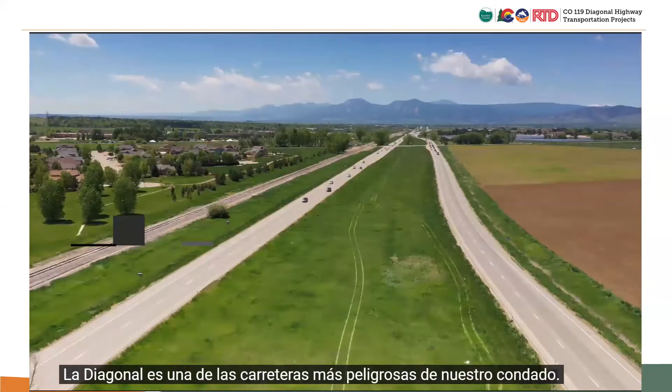State Highway 119, or the Diagonal Highway, is a vital connection between Longmont and Boulder. It is the second most traveled corridor in Boulder County, and it's only going to get busier. The communities and areas served by the highway are some of the fastest growing areas in the Front Range. The Diagonal is one of the most dangerous roadways in our county. There are far too many serious and fatal crashes.

Action is needed to address the current and future congestion and safety problems. So Boulder County has teamed up with the community and local and regional partners to create the multimodal corridor vision for State Highway 119. This vision includes transit improvements, including bus rapid transit, commuter bikeway, and roadway improvements. It will take time to complete the entire vision, but we are making progress.

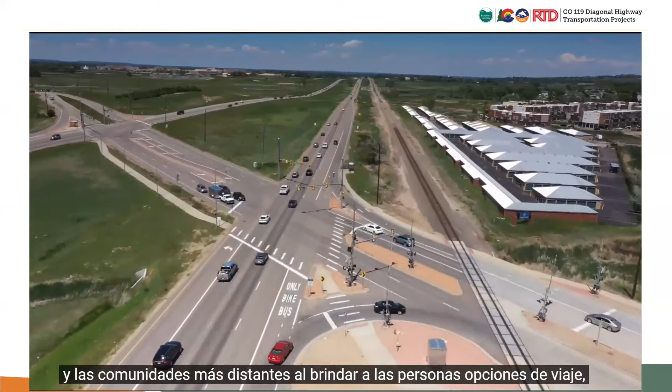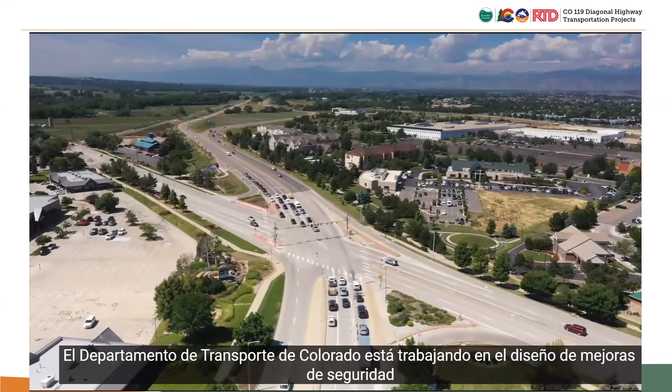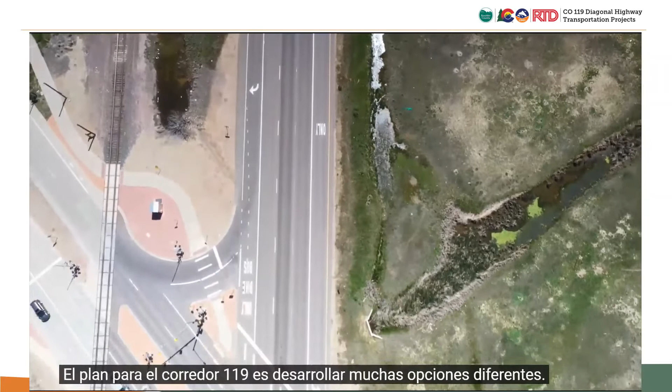The Highway 119 corridor improvements will optimize regional connectivity, safety and mobility between Boulder and Longmont and the communities beyond by providing people with travel choices, including bicycle, riding transit, and driving. The Colorado Department of Transportation is working on the design of safety and mobility improvements for the corridor, including design of the BRT transit elements, roadway, and intersection improvements. The plan for the 119 corridor is to develop a lot of different options.

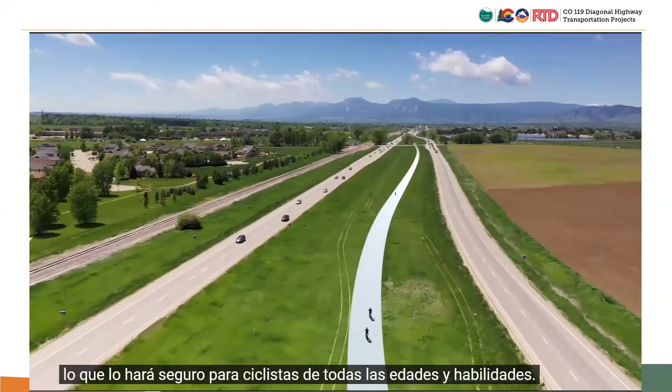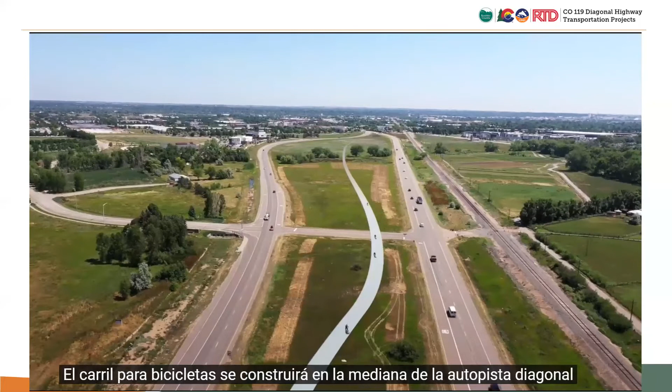The 9-mile hard surface bikeway will be separated from vehicle traffic, making it safe for cyclists of all ages and abilities. As electric bikes become more popular, more people will be able to travel between Longmont and Boulder by bike. The bikeway will be built in the median of the diagonal highway and will make connections to transit stops, regional trails, multi-use paths, and important destinations along the corridor. It will be a year-round path that will be plowed to remain open even during our snowiest months.

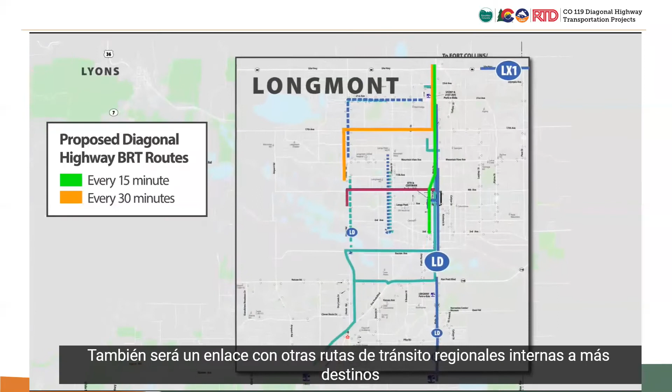The State Highway 119 multimodal corridor vision includes bus rapid transit service, which will provide high-frequency, reliable, and direct transit service from Boulder to Longmont. It will also be a link with other inter-regional transit routes to more destinations in the metro area and beyond.

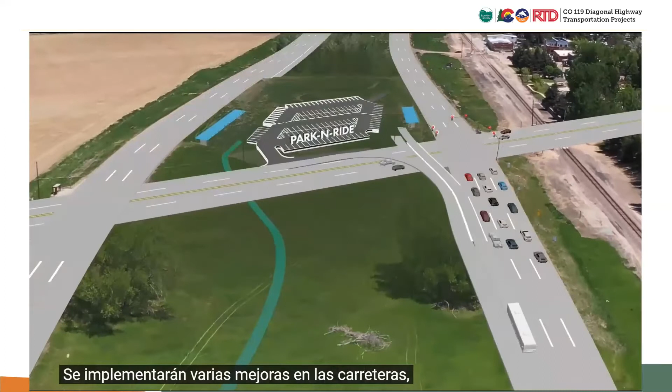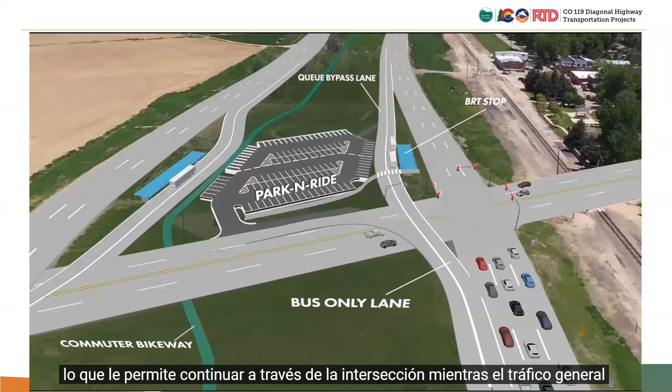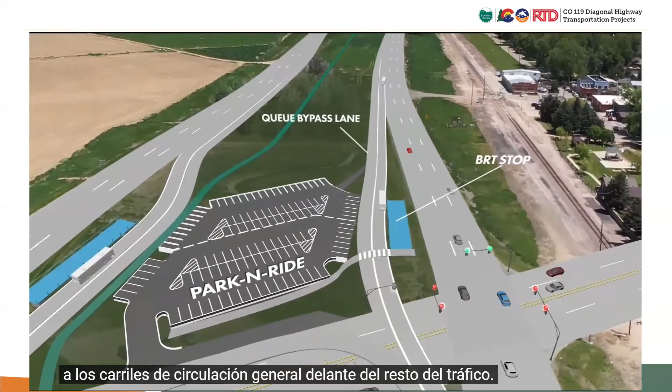Several roadway improvements will be implemented, including queue bypass lanes, which are bus-only lanes at key signalized intersections. While in this lane, the bus receives a special traffic signal, allowing it to proceed through the intersection while general traffic is stopped at the red light. Because buses have the special signal, they can jump ahead and then merge back into the general travel lanes ahead of other traffic. In the future, the BRT service will connect with the Northwest Rail and Front Range passenger rail services.

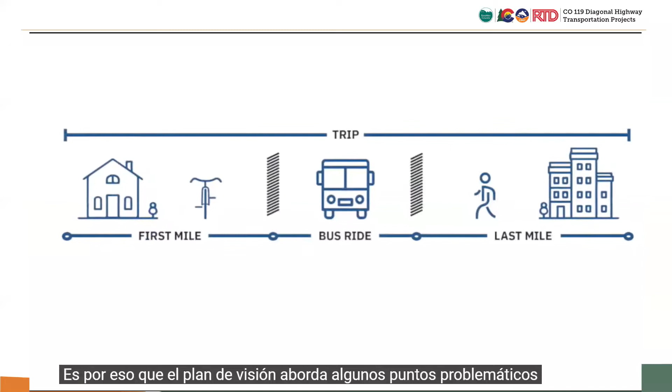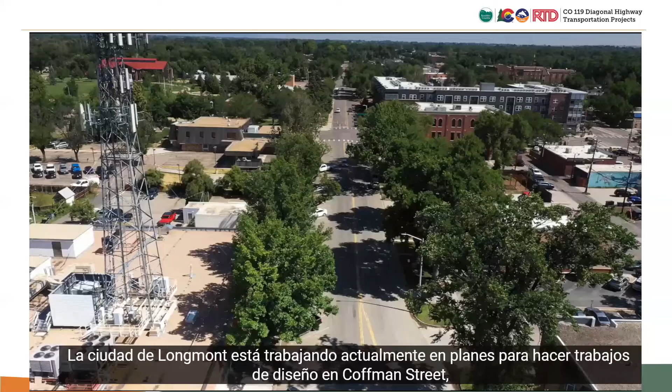Making a trip on the diagonal faster and more enjoyable would be pointless if there were bottlenecks experienced after the journey. That's why the vision plan addresses some troubled spots near the first and last miles of the trip in Boulder and Longmont. The City of Longmont is currently working on plans to do design work on Coffman Street, a busway that will have dedicated transit lanes all the way from 1st Avenue to 9th Avenue in our downtown. This project on Coffman Street will also provide better pedestrian access and pedestrian width for walking, as well as separated bike lanes.

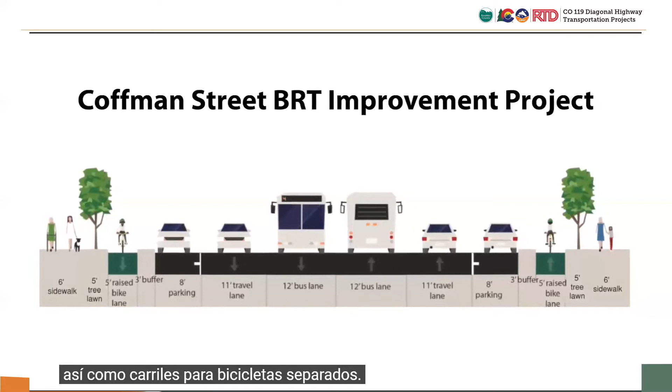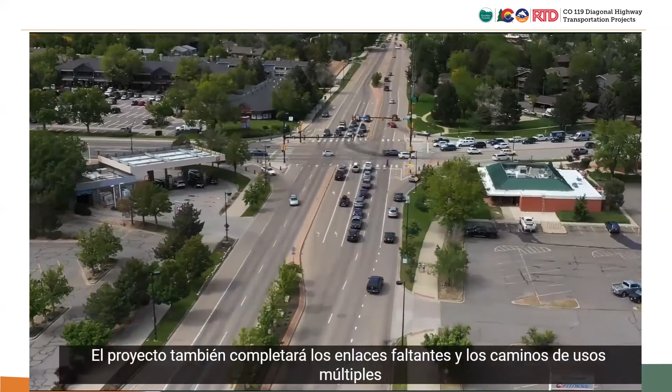So despite all these improvements, automobile traffic will not be impacted at all by this project. The City of Boulder's 28th Street Improvements Project will add continuous business access transit lanes from Iris to Pearl. These lanes will make sure that our BRT service does not get bogged down in traffic. The project will also fill in missing links in the multi-use paths along both sides of 28th from Baseline to Iris in order to create a continuous north-south multi-use path facility.

Improved mobility options and safety on State Highway 119 will ensure the transportation system continues to serve our community today and far into the future. As we move forward with the corridor vision, we'll continue to work with the community to achieve the vision of a safe, accessible, and efficient 119 corridor.

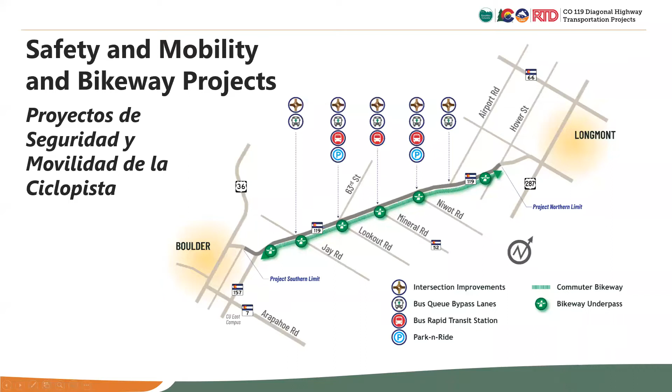We have been working, and we're now at our preliminary design milestone. However, before we dive into some of those design details, let me give you a quick introduction about the corridor. We're here tonight on behalf of two projects, the Safety and Mobility Improvements Project and Commuter Bikeway. Our projects focus on Colorado Highway 119, or Diagonal Highway, between Boulder and Longmont, but as you will see later, they tie into greater RTD's BRT connectivity beyond this corridor. We have numerous project elements planned as part of these two projects, and they include intersection improvements, transit improvements, and a bikeway, which we will explain further throughout this presentation.

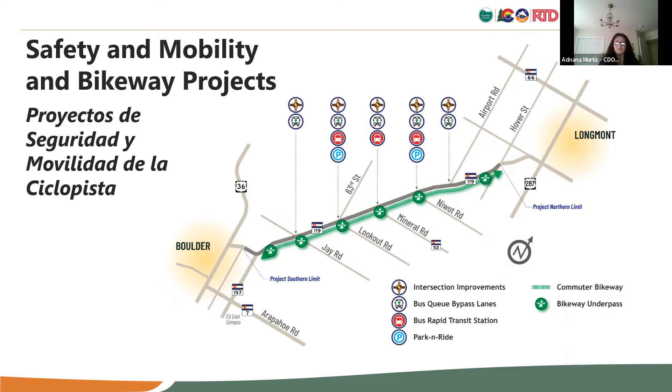Currently, Colorado 119 is the highest crash corridor in the county for motorists and second highest for bikes. During the 5-year period from 2015 to 2019, there were over 900 vehicle crashes, 17 bicycle crashes, and 2 pedestrian crashes. Unfortunately, out of all those crashes, 4 resulted in fatalities.

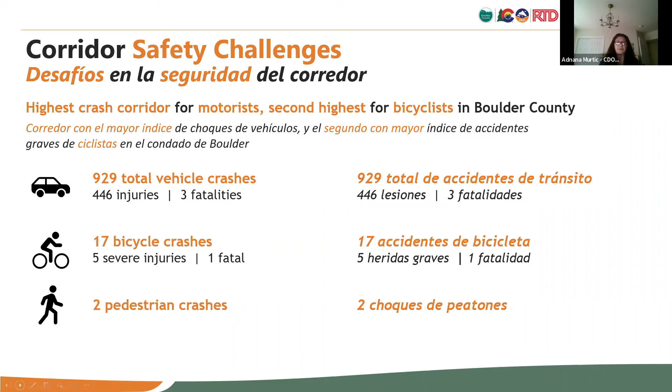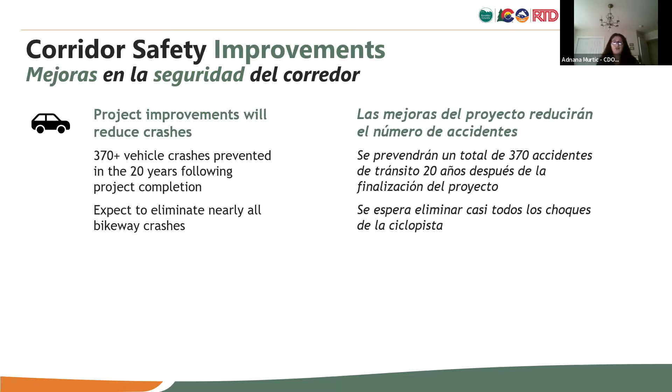Our projects are designed in a way to reduce these crashes and make this corridor safer. Over 20 years following the implementation of these improvements, it is expected that over 370 vehicle crashes will be prevented. The construction of the bikeway is expected to eliminate nearly all bikeway crashes.

This corridor lacks a safe and direct way to travel from Boulder to Longmont by bike, and current BOLT bus service can be sometimes slow and unreliable, which means that many people choose not to ride the bus. The corridor currently has safety and mobility challenges as the region grows, and these could only get worse.

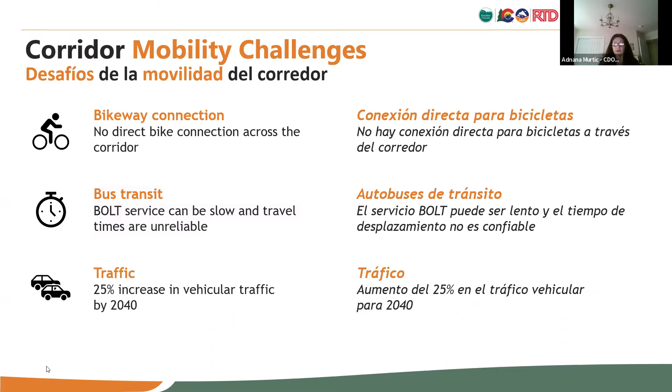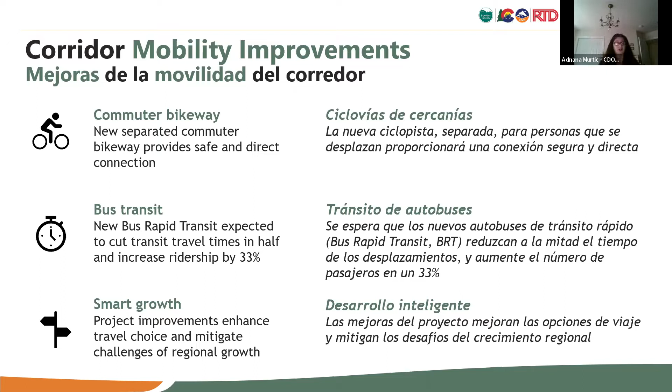These projects are intended to address these challenges and improve mobility. The new commuter bikeway is a safe, direct way for people to commute between these two cities. RTD will be implementing new bus rapid transit service on this corridor, which is expected to cut transit travel times in half and increase ridership as a result. These projects are designed to mitigate the challenges of regional growth and enhance travel choices in the corridor. Carl is going to tell us more about the commuter bikeway and its elements next.

Thank you, Adnana. My name is Karl Buchholz. I'm part of the Bikeway design team, and I'm going to talk a few minutes about the Bikeway project. Our design principles for the Bikeway are to make it safe, direct, and accessible.

We are going to separate it from the mainline road by safely placing it in the median of 119. It's going to be plowed throughout in the wintertime so that it becomes an all-season facility. We will have underpasses at the major cross streets to avoid conflicts with heavy traffic, and we'll provide direct connections to the proposed BRT stations in the corridor.

E-bikes will be allowed, class 1 and class 2 e-bikes, that is. The bikeway will connect to the existing bike networks in the corridor, which I'll talk about in just a minute. The Bikeway will also be ADA accessible - that's Americans with Disabilities Act accessibility - so that it's available for all users to access the Bikeway.

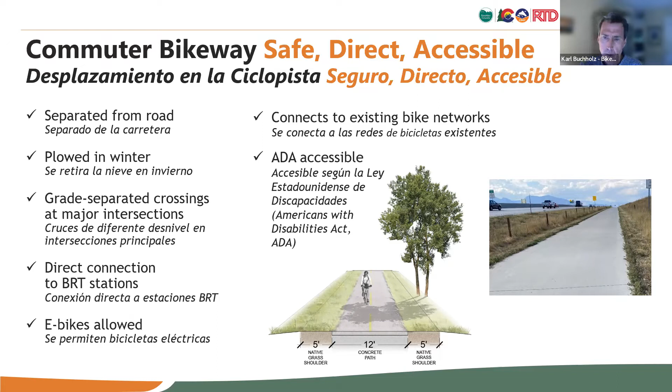I'm sorry, go back please. I also wanted to note the Bikeway will be 12 feet wide throughout, with a few exceptions that I'll mention soon where it'll be widened. It'll include a 5-foot native grass shoulder that will be mowed, and beyond that will just be native grass. The picture on the right, some of you may recognize, is a photo from the US 36 Bikeway, so it will have a similar feel in terms of the cross section and width of the US 36 Bikeway. Next slide, please.

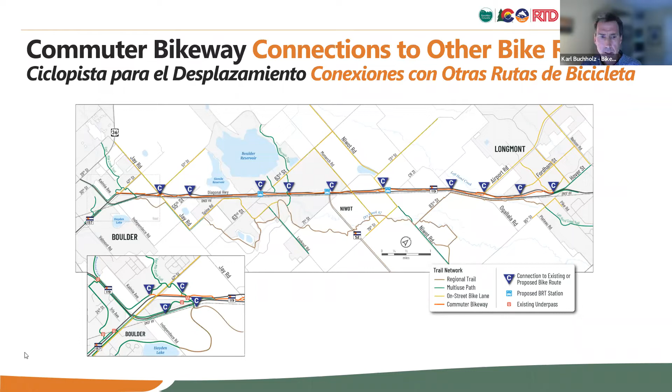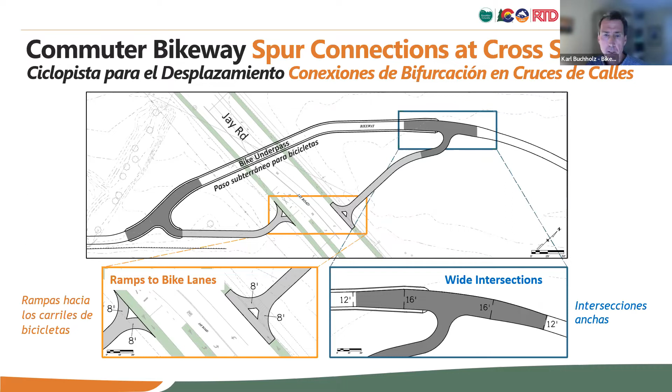As an example, this shows the bikeway at Jay Road, which is towards the southern end of the corridor, with an underpass where the mainline bikeway will go under Jay Road. We will have what we call spur connections that come up to Jay Road to allow bicyclists to access bicycle facilities, and the green lines that you see on this diagram are the bike lanes on Jay Road. The lower left area shows our ramp connections, how we will provide a direct connection to make it easily accessible for bicyclists going in either direction on Jay Road to access the bikeway through the spur connection. The lower right-hand side shows where the spur connection meets the mainline bikeway. At those locations, we will widen out the intersection of those two areas to facilitate turning movements for bicyclists that are accessing the bikeway, and to minimize conflicts with through bicyclists that are going through the intersection. Next slide, please.

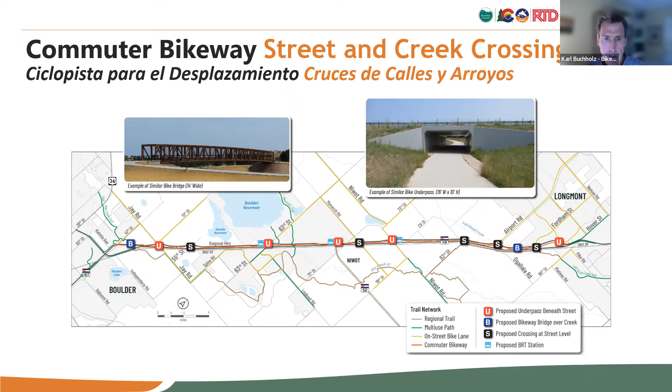We also have a number of barriers that we're crossing in the corridor, shown by the symbols on the map, similar to what you saw before. We have two creeks noted by the blue B - 4 Mile Creek near Boulder and Left Hand Creek in Longmont - that we will be constructing bridges for those overpasses, similar to the picture in the upper left-hand corner. The U symbol is where we have underpasses at the major road crossings of Jay, 63rd, Niwot, Highway 52, and also 119 just north of Fordham Street. The S symbols are where we have at-grade or street level crossings of the minor roadways, the lower traffic minor roadways. I'll talk about those in just a moment. Next slide, please.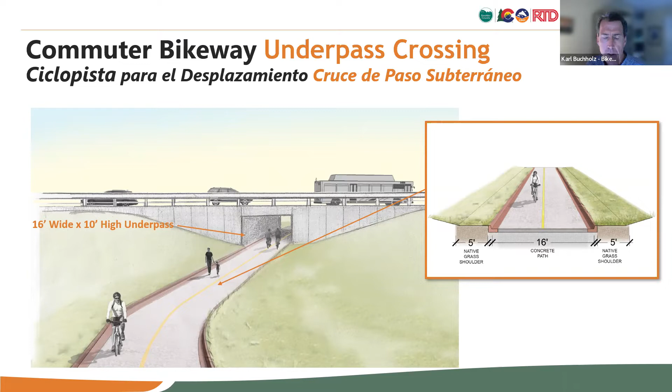Similarly to the other area, we'll have a mowed 5-foot shoulder of native grass, and then the embankment of the area around the underpass as well. Next slide, please.

Now I'll talk briefly about what we call at-grade or street level crossings. There are 5 of these types of crossings at 55th Street, Monarch Road, Oxford Road, 83rd Street, and Fordham Street, where the bikeway will cross at street level. These are all low volume roadways, and we are going to enhance the crossing by providing advanced warning signs for the motorist, in this case on 55th Street is what's shown, but also requiring the motorist to yield to the bicyclist.

We propose to include a raised crossing to ensure that motorists are going slow when they cross the path. The green shaded area you see is what we call sight triangles, where we will ensure good visibility between the bikeway and the motorist as they approach. So there are some areas where we will need to trim or remove some trees to make sure we have good, safe visibility. We'll also be installing warning signs on the bikeway to warn bicyclists of the crossing. This treatment is what you will see at those locations.

And then I'll talk a little bit later about Airport Road. With that, I'm going to turn it over to Ali Imansepahi. Thank you.

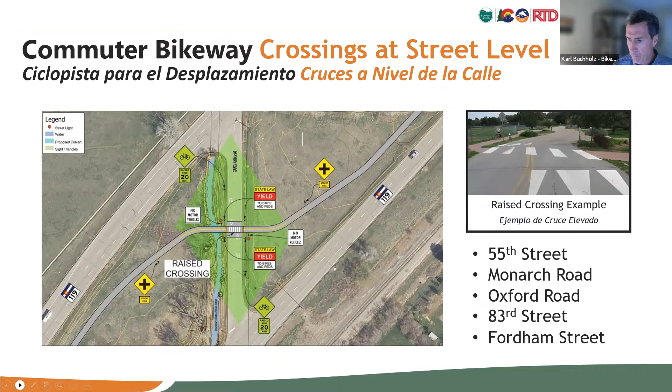Good evening, my name is Ali Imansepahi. I'm the project manager for RTD.

The map here shows what has been envisioned as part of the planning and linkage study that was finalized in 2019, showing two renditions of the BRT, or bus rapid transit, for the corridor connecting downtown Boulder to North Longmont. It's really two projects we're talking about with this map: the safety and mobility project, which is the project we're discussing right now, running from Foothills Parkway to the south to Hover Street to the north. The red logos in Longmont and Boulder are BRT stops that will be implemented in a parallel effort by RTD in the cities of Boulder and Longmont.

With that, we will have major improvements at the CU campus, as well as a new park and ride in Longmont. And in the middle, the park and rides at Niwot Road and 63rd, along with a pair of BRT stops at Mineral Road, or Colorado 52, will also be part of this project.

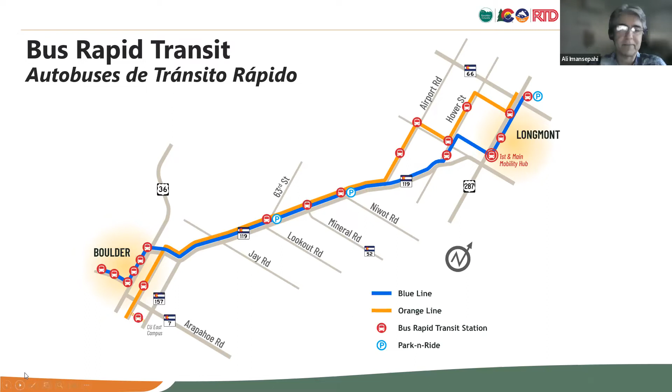A whole host of roadway improvements are envisioned for this corridor. We will be implementing new traffic signals, signing, pavement markings, and lighting at intersections, park and rides, and bus platforms. We will make traffic signals better synchronized and more responsive to real-time traffic conditions. We will be physically reconfiguring the intersection of Colorado 52, IBM Drive, and Mineral Road, all the same intersection. And we'll be making access changes at Airport Road, eliminating left turns from Airport Road and Oglala to make this intersection safer. Next slide.

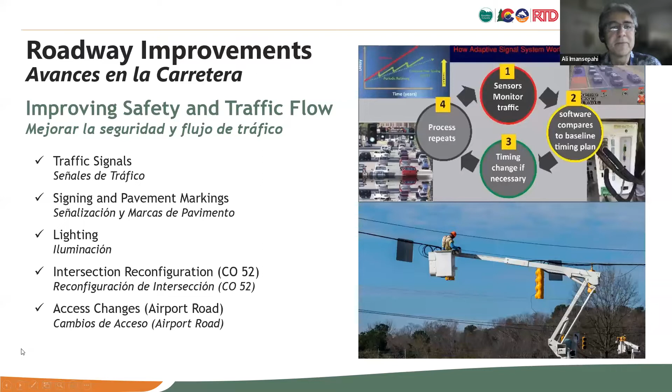ITS, short for Intelligent Transportation Systems, is something that CDOT has been investing in for years now, and this corridor is going to be following the same suit. It's basically integration of technology, electronics, and telecommunications to improve traffic operations and safety, and provide real-time information to travelers of all modes. So it's not just for vehicles, but for transit patrons, pedestrians, and cyclists as well.

A few of these things I can mention are closed circuit TV cameras that you've seen along the roadways and intersections. We will have variable message signs, such as the one you see on this graphic, overhead or side mount, disseminating real-time traffic information as well as PSA announcements such as Amber Alerts, weather information, and more. Road and weather information stations, along with automatic traffic recorders, will also be implemented as part of this project.

All of this information gets fed to CDOT's Traffic Operations Center, where they host the website cotrip.org, which disseminates all sorts of traffic and traveler information to the public and to the media.

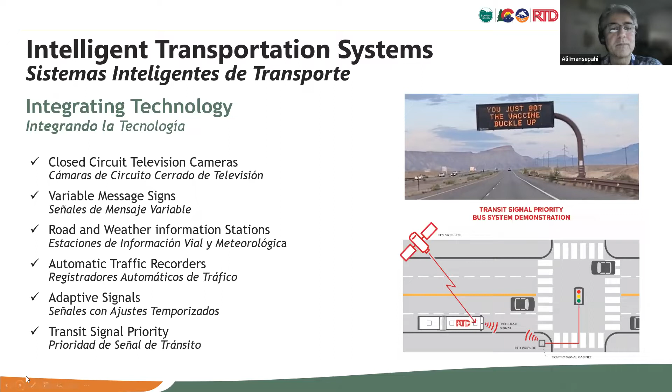We're going to be implementing a whole bunch of queue bypass lanes. The video is showing the bus, well ahead of the intersection, pulling into its own exclusive queue bypass lane, doing its alighting and boarding, pulling up to the intersection, getting its own signal, and then moving ahead of the general purpose traffic. Eventually, on the far side of the intersection, it merges onto the general purpose lane into general traffic. This is one of those things that makes the BRT operation quite a bit faster than traditional bus service. And with that, I'm going to turn it over to Steven.

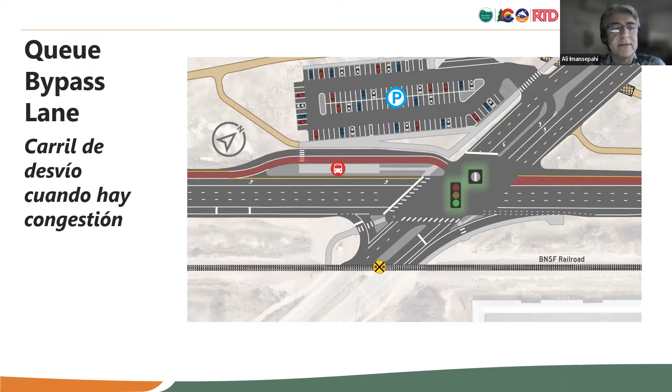Starting at the south end of the project, the first intersection with improvements is at Jay Road. Here you'll see those queue bypass lanes that Ali just explained, right there. You'll also see a series of roadway and traffic improvements such as upgraded signs, roadway striping, lighting, traffic signal upgrades, and those adaptive signal improvements that Ali mentioned as well.

Also at this intersection, the team continues to evaluate pedestrian and bike access, including those first and final mile connections you probably heard about in the video. The existing bike lanes on Jay Road are going to remain the same as they are today, but we're going to be looking at locations of crosswalks, sidewalks, and other critical connections in the corridor and how we can best connect and move people to and from this location. You'll also note the bikeway here has an underpass, as Karl mentioned, and those spur connections at Jay Road that'll allow connections from the roadway to the bikeway and back and forth.

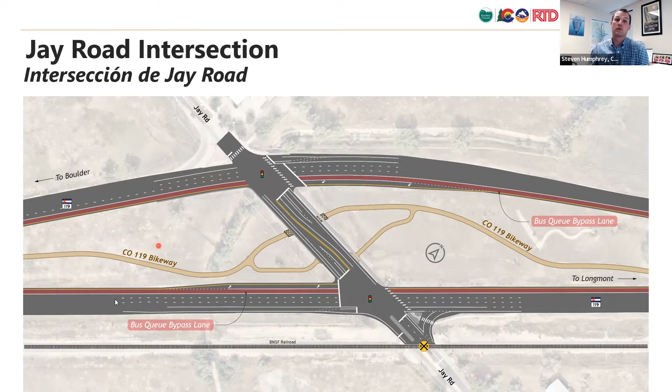Moving on to 63rd Street, a little further north in the corridor, you'll see our first example of a BRT station and park and ride. At this location, we're constructing two stations, as you can see here. Both of them are in the median and on the same west side of 63rd Street. I know that can be confusing on the diagonal. There's also a parking lot.

There are pedestrian connections from that parking lot to those stations, along with the queue bypass lanes we've talked about at Jay Road and that you'll see throughout the corridor. Additionally, there's going to be a bit of a reconfiguration of 63rd Street between northbound and southbound 119 to accommodate access to that parking lot and the park and ride facilities. We're also going to have some drainage, water quality, and other detention improvements in this area.

Similar roadway and traffic improvements will take place here as discussed with Jay Road, along with those pedestrian and bike access considerations. At this intersection, the bike lanes are going to remain the same as they exist today on 63rd Street, but we are going to be constructing a 10-foot multi-use path along the west side that you can see there. And we'll have that bikeway underpass again here at 63rd.

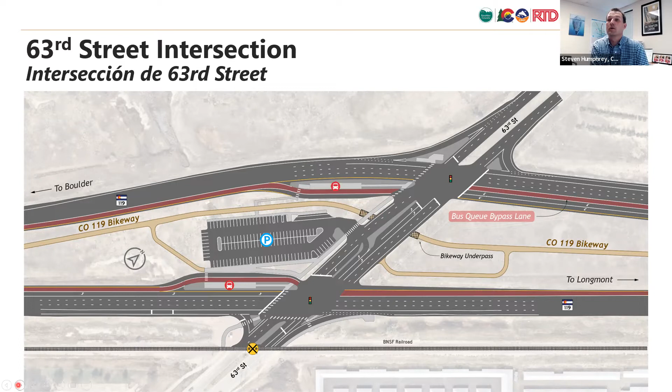All right, moving to 52. We're going to start here on the screen with just a plan view or photo of the existing intersection. The reason for that is right now, 52 has one singular intersection for both northbound and southbound.

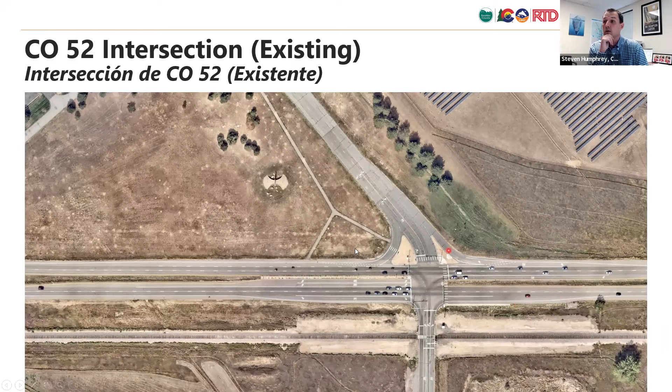If we move to the next slide, you'll see that singular intersection in the background, and up front you'll see the new proposed improvements. As you can probably tell, this is one of the more significant sets of improvements for the corridor. Hopefully you can see that shift south and east in the area of the diagonal, and that separation between northbound and southbound.

One question that may come up is, why are we making such a big change here at 52? I think this area highlights one of the biggest challenges within the corridor, which is the long queuing of cars, especially during peak hours. Cars back up quite a bit longer than you might expect, with traffic quite a distance from the intersection, leading to crashes between distracted drivers and cars stopped in front of them. So our hope in this area is to realign and separate southbound from northbound so we can improve traffic flow and hopefully have less of that dangerous queuing and those rear end crashes.

Also here, we'll be constructing BRT stations at this location, although here we've got them on opposite sides of 52, as you can see. And we do not have a parking lot at the 52 intersection.

And of course, with all the new improvements here, we'll also be including those queue bypass lanes and the roadway and traffic improvements we've touched on before, and a connected multi-use path through this area. And, a bit like a broken record tonight, we'll have a bikeway underpass planned at this location as well.

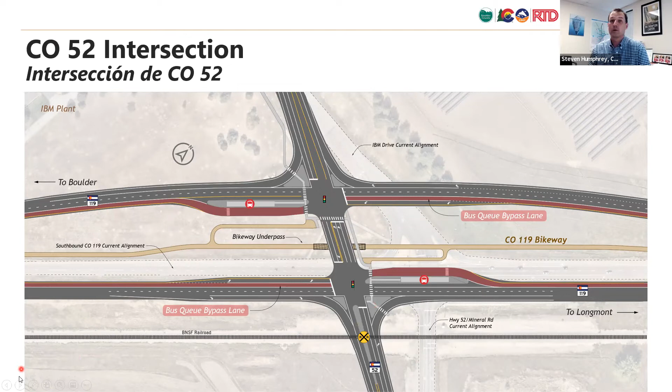We can go ahead and move on to Niwot Road. Here you'll see an intersection very similar to that of 63rd, with another BRT station and park and ride lot. Again, as at 63rd, we've got the stations both on that same side of the intersection. We'll be reconstructing the parking lot here and adding drainage, water quality, and detention improvements, as well as the queue bypass lanes.

Like I've mentioned before, we'll have similar roadway and traffic improvements and pedestrian and bike access considerations. At Niwot, we're not making any adjustments to the current bike lanes that exist on the cross street. Again, we'll be constructing a multi-use path along the northeast side of the intersection, and we again have a bikeway underpass planned here.

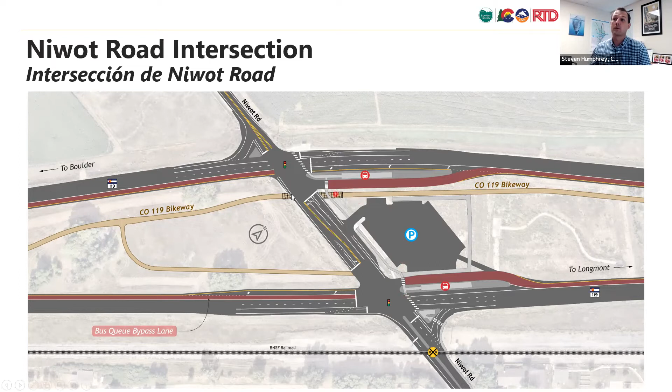Finally, at Airport Road, as Ali mentioned, we are proposing a change in access to the intersections here. With this project, we're proposing the roadway between northbound and southbound 119 be changed to a one-way in the northbound direction, meaning Airport Road southbound would be right turn only. In addition, northbound Ogallala Road would also be right turn only.

There are several facets at work as to why we're making this change at 119 and Airport Road. Some of the key considerations were safety at these two intersections, operations of the corridor, how we can move vehicles and buses safely along the corridor, and also facilitating the proposed BRT routes. One of the proposed routes runs from northbound 119 to northbound Airport. So there are many factors at work, and we'd be happy to dive into more of the details offline as to how and why this decision was made here at Airport Road.

Continuing with some of the other improvements here for southbound 119, you'll see we've got those queue bypass lanes again that'll be constructed, and similar safety and operations improvements we've talked about throughout the rest of the corridor. We'll also be looking at pedestrian and bike considerations here as well.

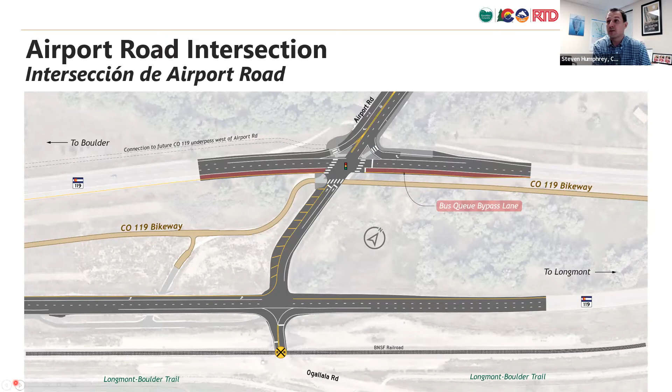And so to discuss some of those details at more length and with more consideration with the Bikeway, I'll turn this back over to Karl so he can dive into some of those details.

Thank you, Steven. This graphic shows a blow up of the intersection that Steven was just talking about. The dashed lines show bicycle movements to and from Airport Road going to the north of the blue line. That would be southbound bicycle traffic.

Steven mentioned the right turn only lane from southbound Airport Road to Boulder bound 119. That is a high volume movement. By essentially repurposing some of the Airport Road pavement width, we're able to provide a wider bike lane on Airport Road, and then provide a safer connection across the right turning movement. That would be a raised crossing to bring bicyclists into a raised island in the intersection of 119 and Airport Road, and then using the signal to cross across 119.

And then in the opposite direction, represented by the purple dashed line, bicyclists would cross Airport Road at grade there, and that crossing would be with a signal, just like the other direction, and it would be green most of the time for bicyclists, just like it is for cars, and there are no turning movement conflicts there, so that is a safer crossing than what's there today.

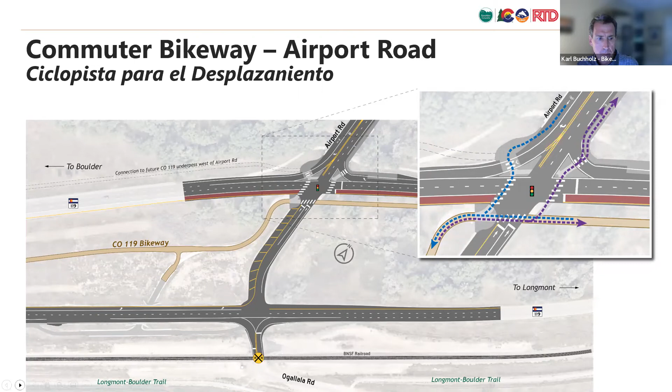As I mentioned earlier, both projects, the safety and mobility improvement projects and Bikeway project, are in preliminary design phase, and both projects expect to complete final design in summer of 2023. Throughout design, our Community Advisory Committee and Equity Advisory Committee have guided our projects, providing crucial firsthand knowledge about this corridor. Construction of immediate project elements is targeted to begin in early 2024.

And as we work through final design, we'll have more information about schedule and construction impacts, and we will definitely share that information with you at our final community meeting, also scheduled for summer of 2023.

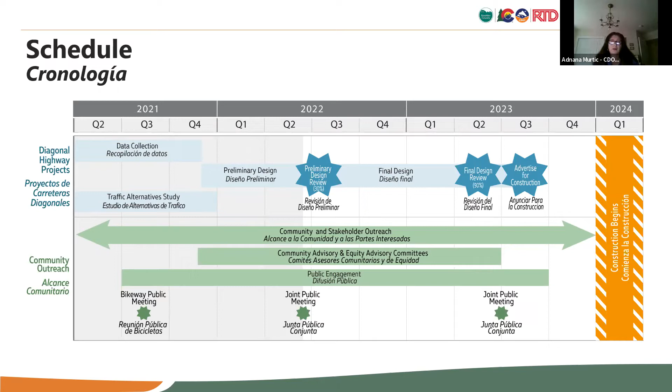Our projects have an estimated project cost of $122 million. And through agencies, contributions, and grants, so far we have secured 91 million. We're actively seeking the additional 31 million still needed to finish both projects.

So when we go to bid for construction next year, we will build the project elements we have funding for. These elements include the roadway safety and operation improvements, queue bypass lanes, park and rides, BRT stations, and underpasses for the bikeway. As additional funding becomes available, then we will build the remaining project elements.

Now back to you, Carla. Thank you, Adnana. And thank you to all of our presenters this evening for that very thorough project overview.